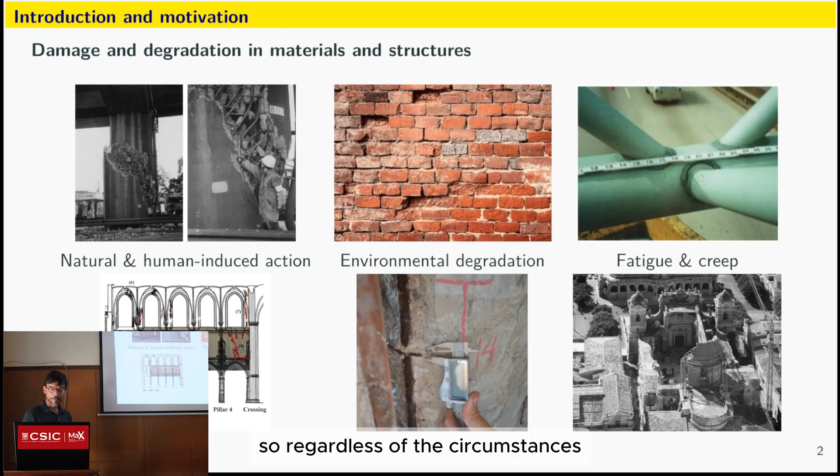Regardless of the circumstances, we all do research, and we do it for very specific reasons. In the case of the analysis of structures, the assessment of their condition and performance, we have to deal with some very specific and very serious problems related to the development of damage and degradation at the material level of existing buildings.

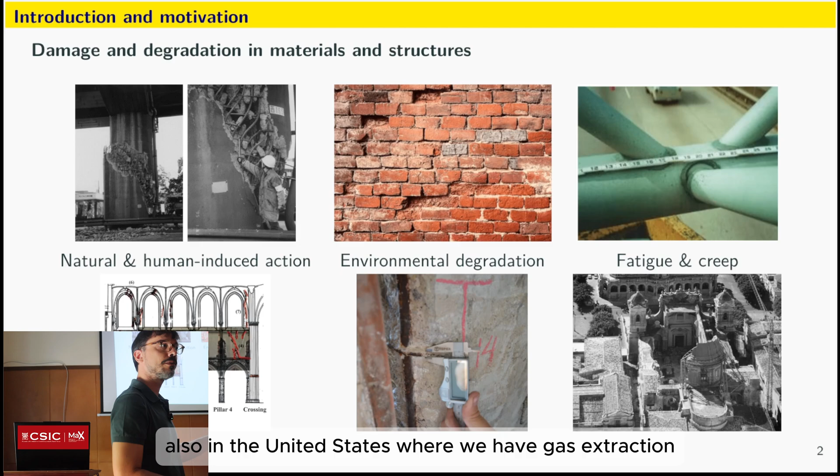We have many different actions that impose a burden on the structures. We have seismicity, movement of the soil, either dynamic or static, caused by tectonic earthquakes, and more recently in Switzerland, in the Netherlands, also in the United States, where we have gas extraction, oil extraction, mining. We have human-induced seismicity, which can cause severe demand on existing structures.

We also have environmental degradation from climatic conditions, from pollution, from chemical contamination of the materials, which in masonry structures is not such a serious problem. It can cause superficial degradation, but doesn't very often endanger the condition of the structure. But in a reinforced concrete structure, where the main source of weakness is the reinforcement, this can be a severe problem. And of course we have problems with fatigue and creep.

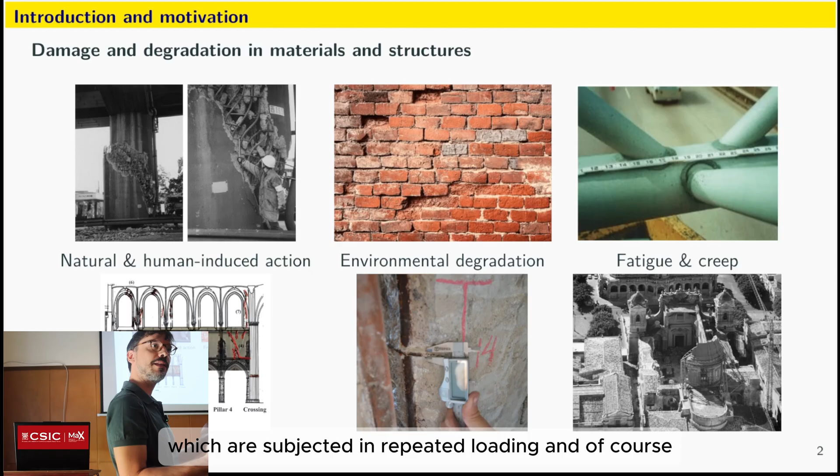Fatigue is a very big problem in infrastructure, mostly in bridges, which are subjected to repeated loading. And creep in historic structures, heavy structures subjected mainly to compression, can lead to admittedly spectacular, but very serious collapses, such as has happened in historic buildings in the past.

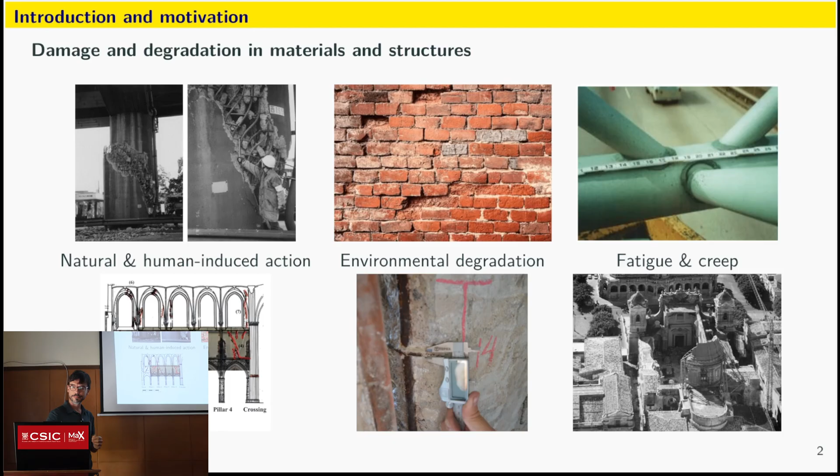All of these things can deteriorate the condition of the structure. It can cause loss of architectural and cultural value, and it can lead to loss of life. And of course, we do not want to have any of that. So this is all related to damage.

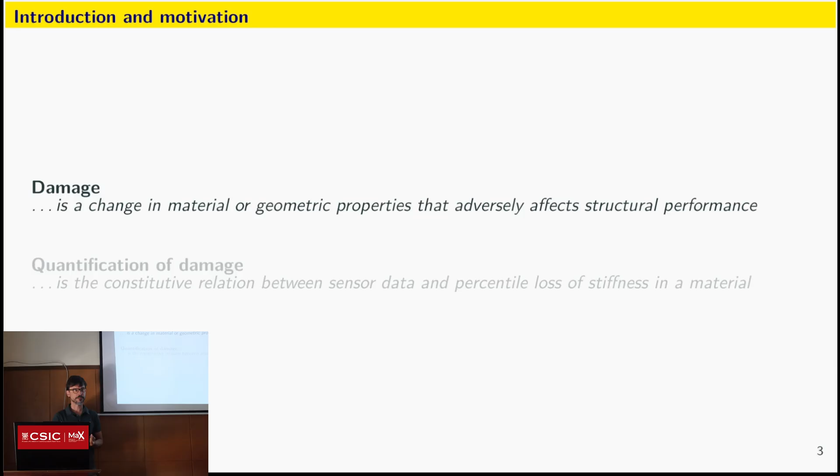We all know what damage is, but let's start with a basic definition. It is a change, a degradation of material or geometric properties that affect essentially stiffness and strength - structural performance. Of course, we need to define what structural performance is. We know what damage is, but we do not really know how to quantify it, how to relate one physical variable that we measure to a degradation of strength and stiffness.

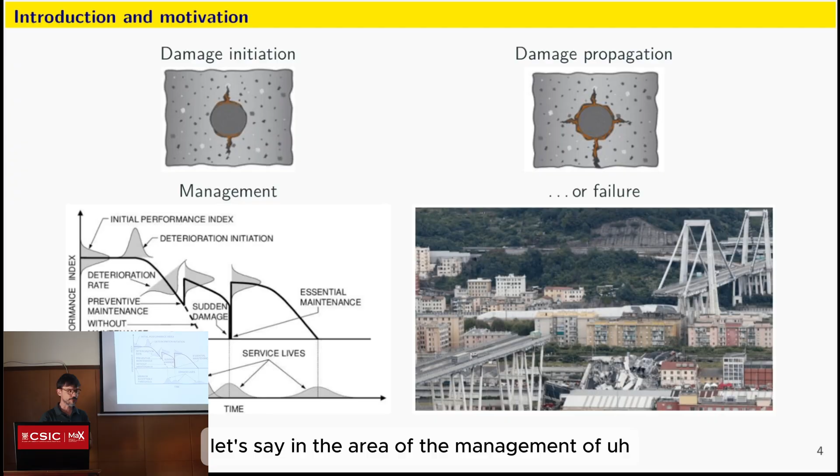And why is this important? I really don't need to tell you, but let's remind ourselves of what we are doing here. In the area of management of infrastructure, of buildings, what we want is to maintain a certain level of structural performance, which is affected by the onset and development of damage.

At the levels where the damage is not really visible in the structure, such as when we have corrosion of the reinforcement, which can cause cracks in the interior of a building, this does not affect performance very much, but we also cannot really see it. At the point where corrosion damage is so severe that we can see it, structural performance, let's say a quantitative index, has degraded quite a bit.

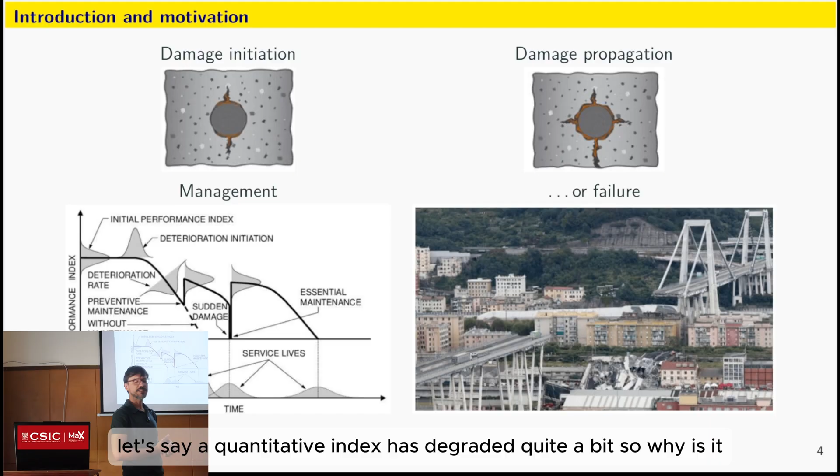So why is it important to detect the damage while it is still limited? Because it can be counteracted with simple interventions, technically and economically beneficial, and interventions that do not take too long and are not too disruptive. Of course, when we rely only on visual inspection to intervene and to strengthen or repair, then the cost of maintenance is much higher. So this is what we want to avoid.

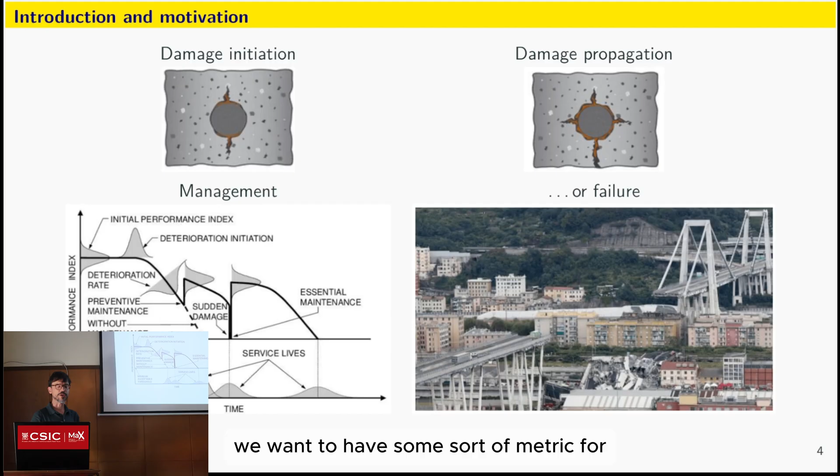We want to have some sort of metric for the performance index, and we want to be able to detect the damage before it becomes too serious. We have basically two avenues, two groups of methods that we employ, both very useful, both very important. First of all, we have non-destructive examination, evaluation, testing, however you want to call it.

It's kind of like a spot test. You go once to the structure, you inspect, you collect some data, and then you relate it to, or input it to, some sort of computational model in order to assess the condition of the structure. So this is all quite manual, very hands-on. You go, you collect, and then you go and process.

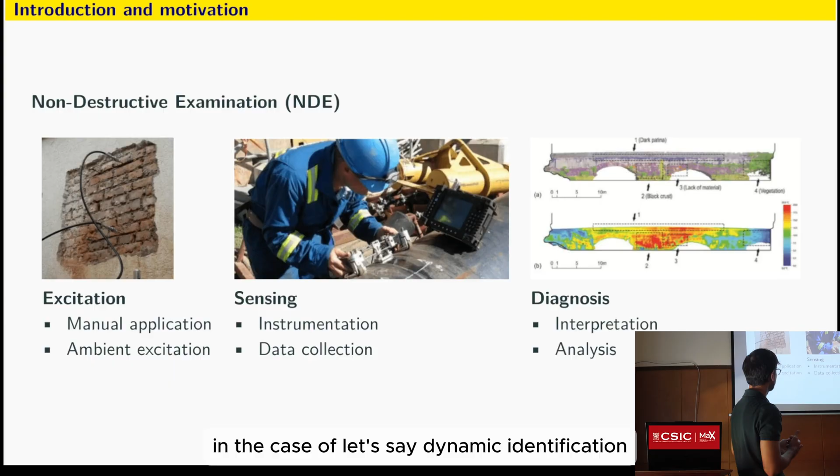You might, in fact, induce a little bit of manual excitation on the structure in the case of, let's say, dynamic identification, or you might rely only on ambient excitation. The instrumentation is usually simple, not cheap, but simple, just to apply and collect the data. We do a spot data collection, and then we go back to the office and we do the diagnosis based on some sort of mathematical model. We interpret the results that we get and we perform an analysis.

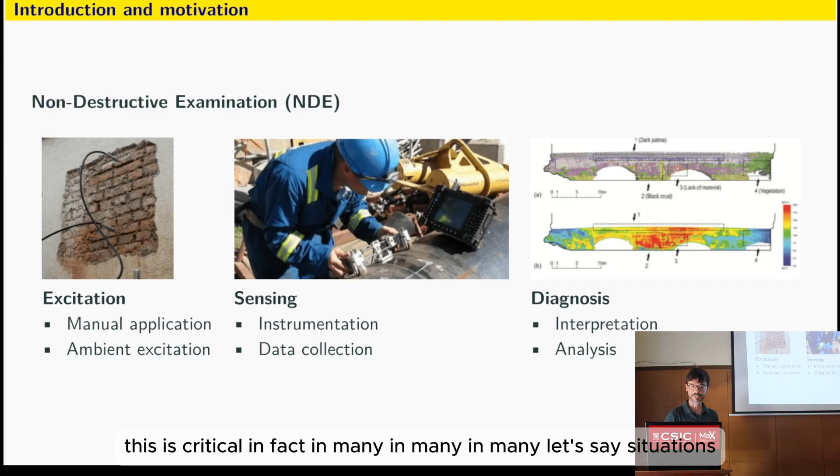So this is all very good. This is critical, in fact, in many situations, but it does not tell the whole story. If we want to have the whole story of what is going on in a structure, we need to monitor it. We need to be able to see the degradation happening in real time. We need to monitor some sort of physical parameter, some physical property, and relate it to some sort of performance index. What are the things that we usually measure?

Temperature, displacements, strains, some other things that we will see later on. The instrumentation for this is a little bit more involved, because it also involves the collection in real time of the data and the processing of the data in real time. And this imposes a few more requirements in terms of supplying all of these systems with electricity, some sort of connection for transmitting the data.

And of course, the processing of this data, since it is real time, it is dynamic, it's a little bit more involved. It involves some sort of signal processing to cancel out periodic or temporal effects, to be able to extract some features of the response, and to be able to quantify it. Relate the measurements of physical properties to a material or a structural property.

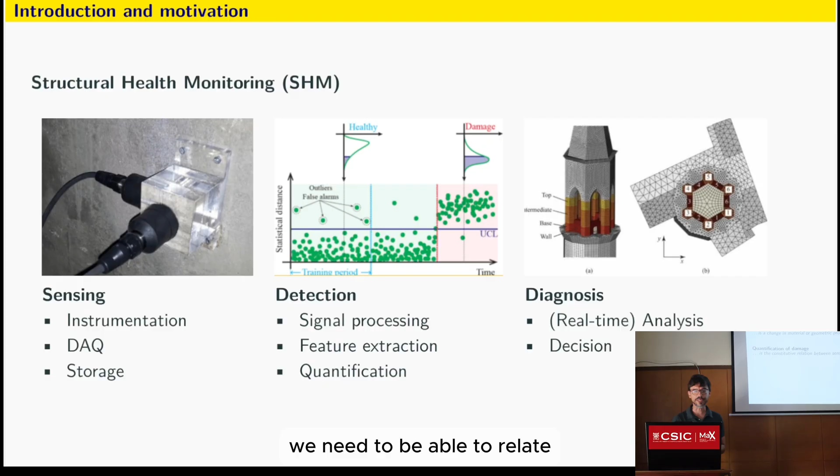So this is where, let's say, the concept of quantification of damage comes in. We need to be able to relate, have a constitutive relation between the data that we collect from sensors and some sort of performance parameter, okay, or a percentile loss of the stiffness or the strength of a material.

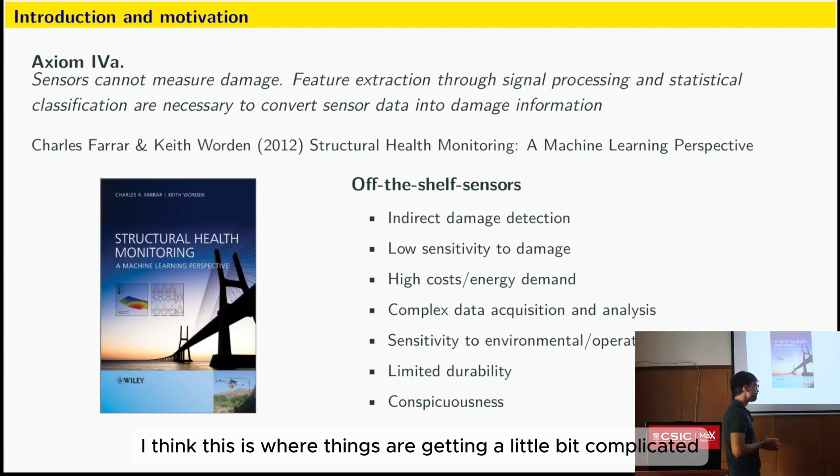Now, I think this is where things are getting a little bit complicated. It is a kind of an aphorism, but I think that it is relatively true, that we do not really have a direct relationship between the data that we extract from ordinary off-the-shelf sensors and, let's say, a material parameter that we can use in our computational model for the structure. So the data that we get from the sensors, we have to get through a lot of intermediate steps before we can have a proper analysis of the structure. And if you want to have a real-time model of the structure, this is quite a bit of an obstacle. So we're not there yet, I think, with off-the-shelf sensors, which also are characterized by an additional series of limitations.

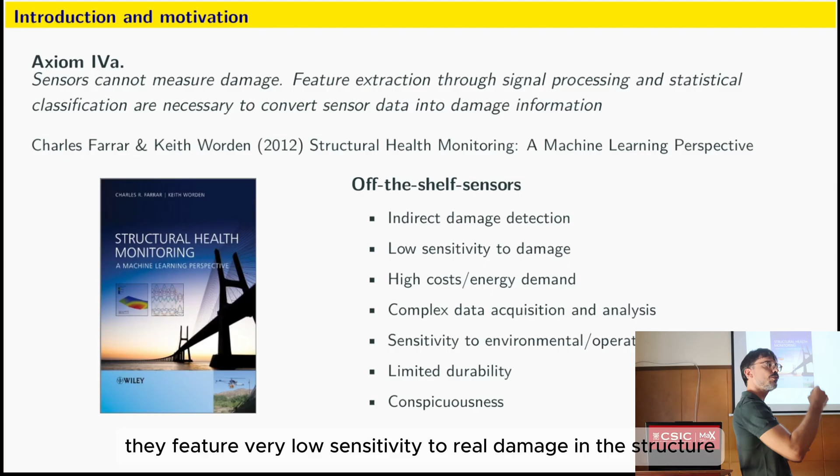Off-the-shelf sensors, like strain gauges, I'm particularly thinking about strain gauges, they have a very poor response to damage. If a structure is damaged in one point, it is very difficult to capture this effect with a strain gauge. They feature very low sensitivity to real damage in the structure. They also have quite substantial costs for installation, maintenance, and replacement, because their durability is not that strong. A strain gauge on a bridge exposed to the elements lasts for maybe 1 or 2 years.

And of course we have the problems that we discussed previously regarding complex data acquisition and analysis and sensitivity to environmental conditions. I would also add that sensors typically do not deform along with the structure. There is an incompatibility problem between the structure and the sensors.

So all of this is quite bleak, quite negative, but there are ways to go around all of these problems without altering the structure too much. I think the key is to have some sort of embedded sensor within the structure, something that is compatible structurally with the structure, deforms along with it, which means it has a double function within the structure, both structural and as a sensor.

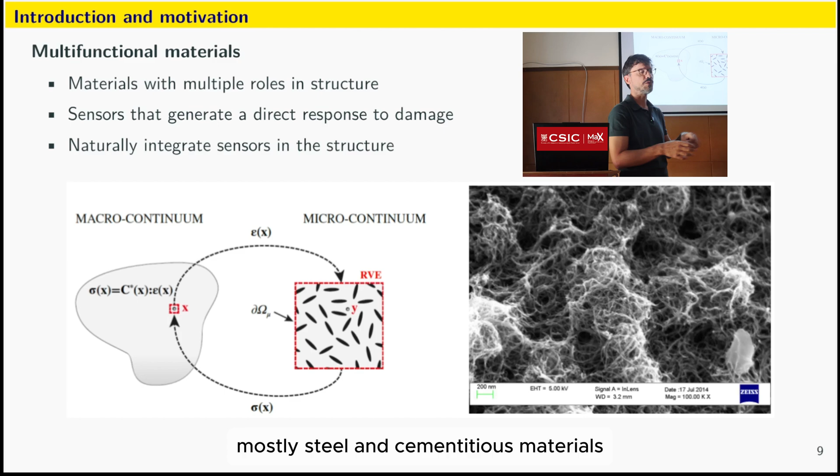Something that responds directly to damage, that gives you a radically different sensing result when the sensor itself is damaged, and something that can be naturally integrated within it. Since the existing materials that we ordinarily use for our structures, mostly steel and cementitious materials, do not feature these characteristics, we need to induce them somehow.

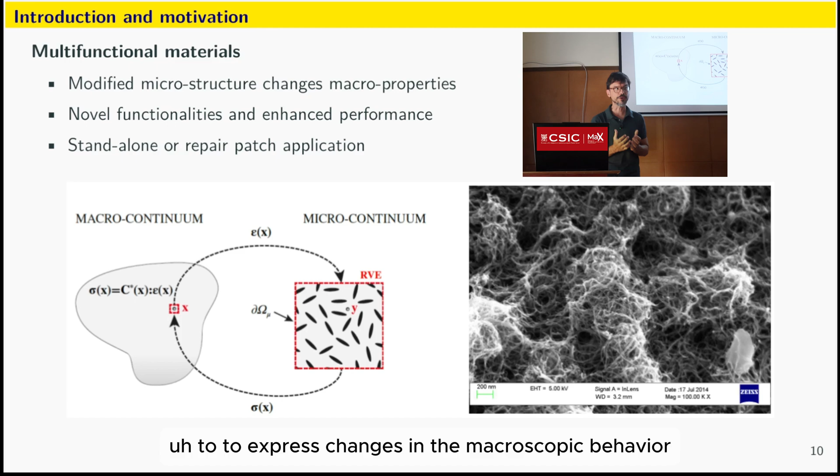The way to do this is to introduce changes into their microstructure, into the properties of their microstructure. We need to find a way to induce changes in the microstructure in order for the material to express changes in the macroscopic behavior, both as a structural component and as a sensor. These modified materials, in this way, we can introduce new functionalities and enhanced performance, both as sensors and as structural components.

And we can create materials that we can use as sensors in repair patches in existing buildings. We go directly to the place where we have registered damage, and we apply this new material, and we have at the same time a repair material and a sensor, either distributed or localized.

So, in order to do this, we have to harness a little bit some very classical behavior that is featured in really all materials. And I'm talking here about electrical resistance. All materials, or solid materials, have some sort of electrical resistance. They respond differently to an induced current. But also the resistance changes depending on the strain, the deformation characteristics of the material.

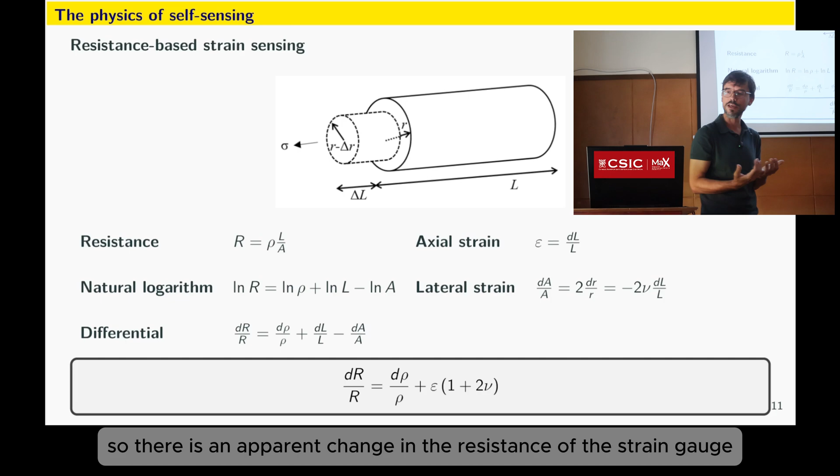Take, for example, the typical strain gauge. The way it functions is the strain gauge is deformed. The electric current going through the strain gauge needs to travel a longer distance, so there is an apparent change in the resistance of the strain gauge. This is what is called the piezoresistive effect, and it is a feature of really all solid materials. It is also present in cementitious materials as well.

So these are the equations. I don't think it's very interesting to get into that. But what we are mostly interested in is this part: the relation between the change in electrical resistivity of a material and an induced strain. If we can somehow control or amplify this effect, we can create materials that are very sensitive in that regard, where we induce a small change in the strain and we get a huge difference in the electrical resistivity. So this is what we need to do.

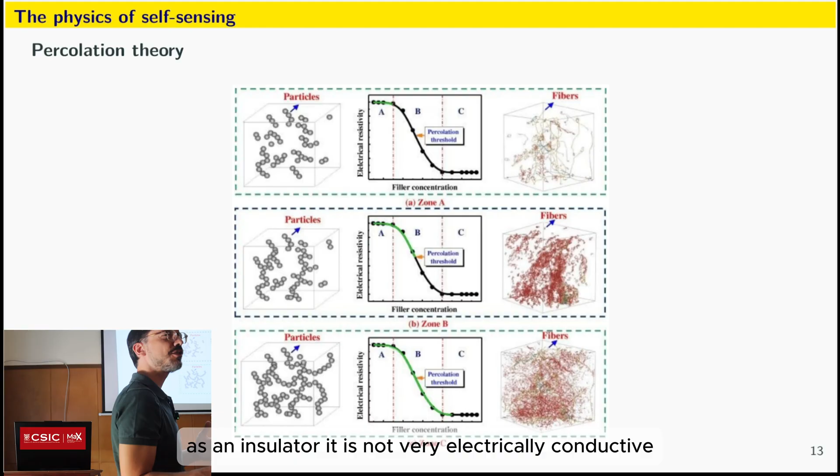Being a common feature in really all types of solid materials, it is interesting to extract some very basic features of this performance. Let's say that we have an ordinary material that more or less acts as an insulator, not very electrically conductive. If we can somehow disperse within the mass of the material some sort of conductive additive, we can in fact control the electrical resistivity of this material. The more conductive material that we introduce inside of the virgin initial material, the more the electrical resistivity decreases. And in fact, at the end, we reach a certain point where we turn it into a highly efficient conductor. But we do not want to make electrical conductors.

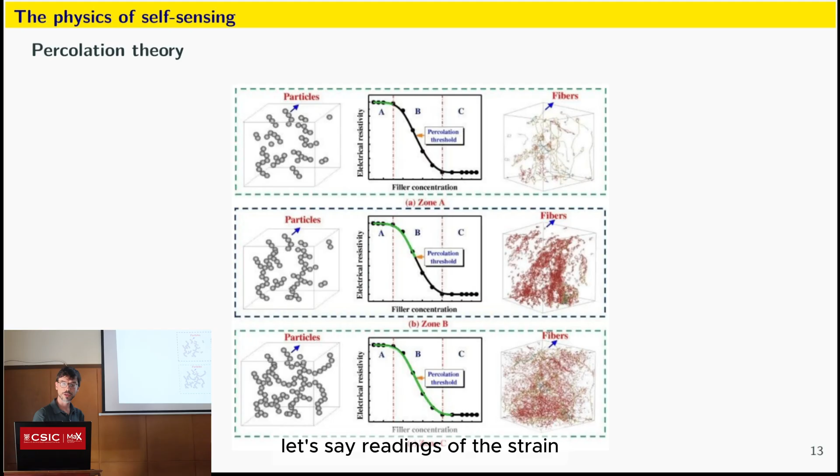We want to make sensors. And sensors need to be sensitive to changes in the strain. The point where this happens is what we call the percolation threshold. It is the point where the piezoresistive performance of a material is optimized. It is where it has the highest sensitivity and also the more stable readings of the strain. So we want to achieve that. We want to have a virgin material and put as much conductive additive inside of it as needed in order to turn it into an efficient sensor.

And then, of course, we have to calibrate it. We have to perform coupled mechanical and electrical tests in order to verify that this sensor has been optimized. So we need to do various mechanical tests, usually compressive tests.

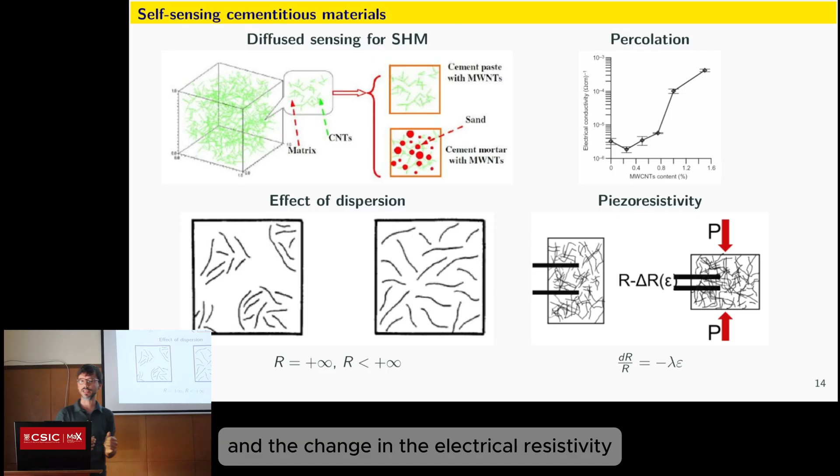To obtain a constitutive relation between the strain and the change in electrical resistivity. Artificial intelligence is nice, but it's always very important to go back to the physics in order to understand what is going on. So knowing all of this, and knowing a few things about the construction industry, we have to decide what sort of material we want to take and modify. In my opinion, and in the opinion of many people, cementitious materials are the best option for this. But why is this true?

First of all, what is a cementitious material? It's some sort of connecting matrix, some sort of connecting glue, which can be lime or cement, mixed with some sort of aggregate, like sand or gravel in the case of mortar or concrete, and whatever type of fillers we choose to include. I'm talking here about conductive fillers, which can be either in the nanoscale, the microscale, or even the macroscopic scale.

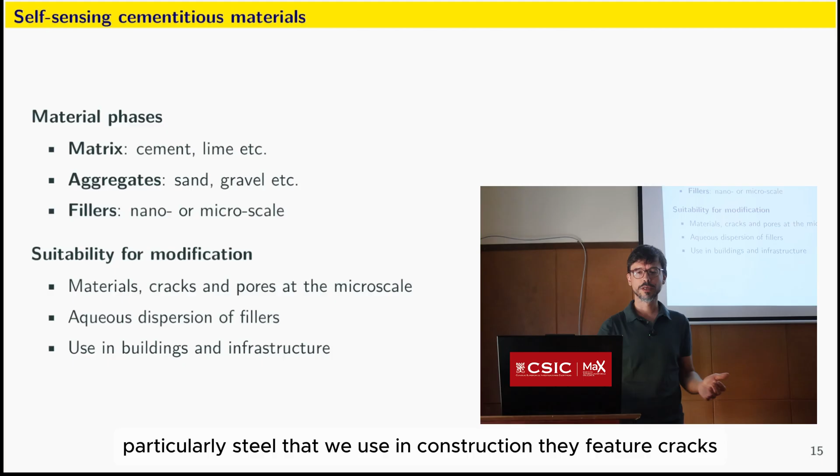And why are these materials exceptionally suitable for modification? I think the reasons are quite simple. First of all, these materials, in contrast to polymers or metals, particularly steel that we use in construction, feature cracks, imperfections, pores at the microscale, which is what we are trying to modify in order to change the behavior of these materials.

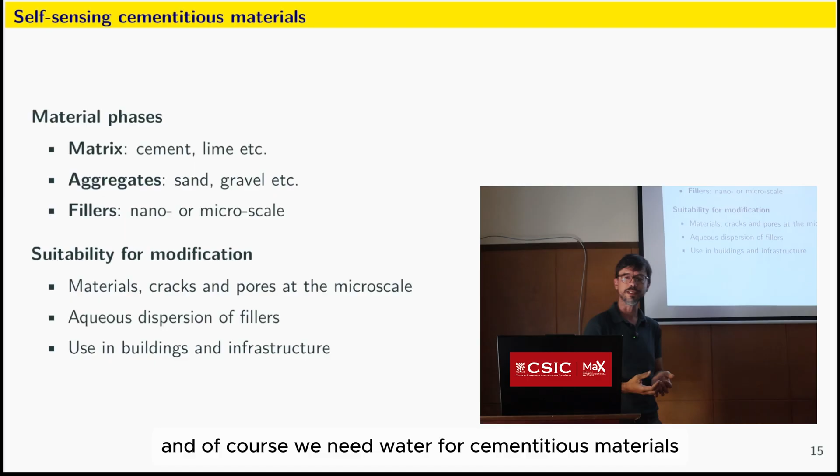Next, since we want the conductive materials to be evenly dispersed within the modified material, we want some sort of medium for dispersing. I think water is one of the best mediums we have to achieve this dispersion, and of course we need water for cementitious materials anyway. The final reason is that we use cementitious materials for everything - for structural elements, for rendering, for pavements, in bridges.

So the scope of applications is enormous. We can monitor strain, we can monitor temperature in a distributed way, we can monitor traffic in bridges - we can use them for really whatever we want.

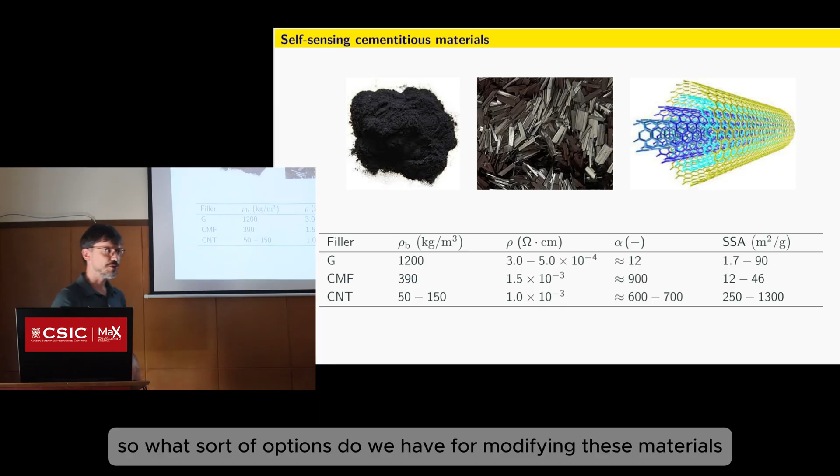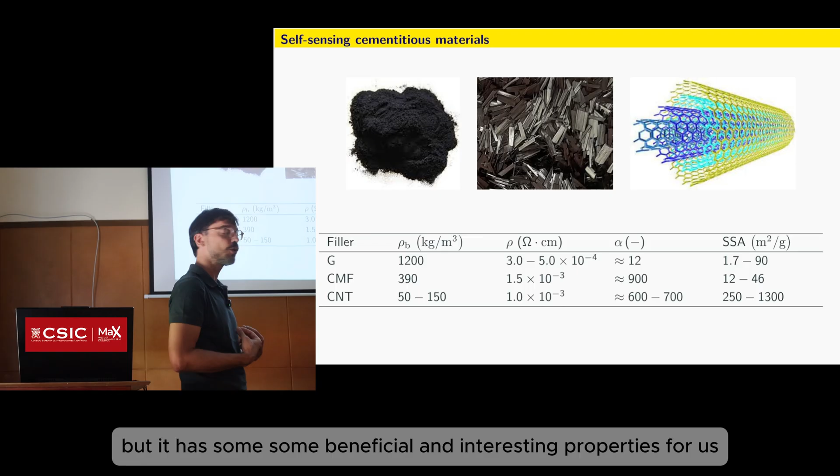So what sort of options do we have for modifying these materials? I think most people have worked with three sorts of materials - two of them because they are easy to use, and the third because it is quite popular. I'm talking about graphite powder, a material that costs really nothing and you can find it everywhere, but it has some beneficial and interesting properties for us, namely the high electrical conductivity. Anything based on carbon is going to be very, very electrically conductive.

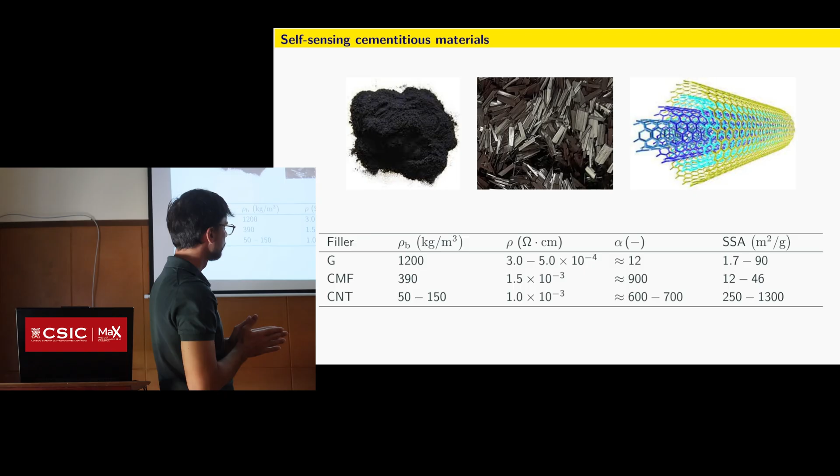Next, we have carbon microfibers. We're not talking about long fibers coming in tows, but chopped microfibers, something that can be dispersed in the material and create a conductive network. They also cost nothing, they're very light, and they have a very high aspect ratio as a filament - they are like a thread.

What we know is that when you create a composite material and want to modify its properties, when you introduce a filler that has a high aspect ratio, you need a much smaller percentage in order to modify it efficiently. Graphite is not characterized by this high aspect ratio, but it is of course very easy to obtain and disperse.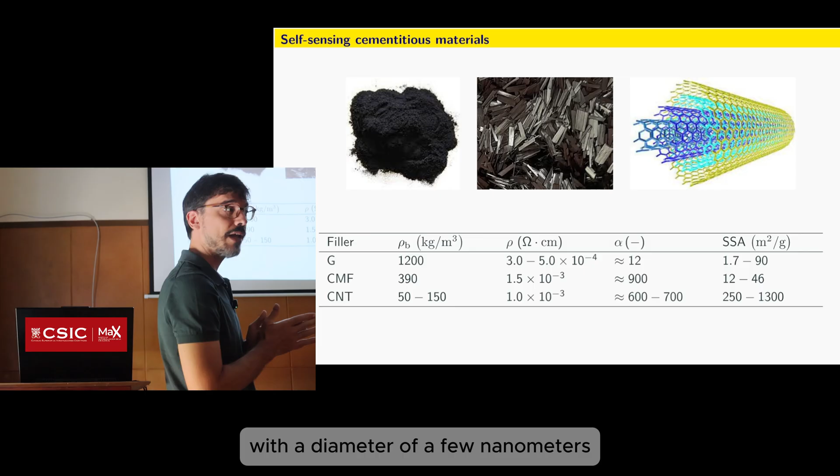And finally, we have carbon nanotubes, which are again filaments, which is what we want to see, with a diameter of a few nanometers. Now we're starting to introduce some difficulties, as we will see later. They have the properties we want - very high strength, very high electrical conductivity, very high aspect ratio - but the difficulties arise when we want to disperse them inside the material.

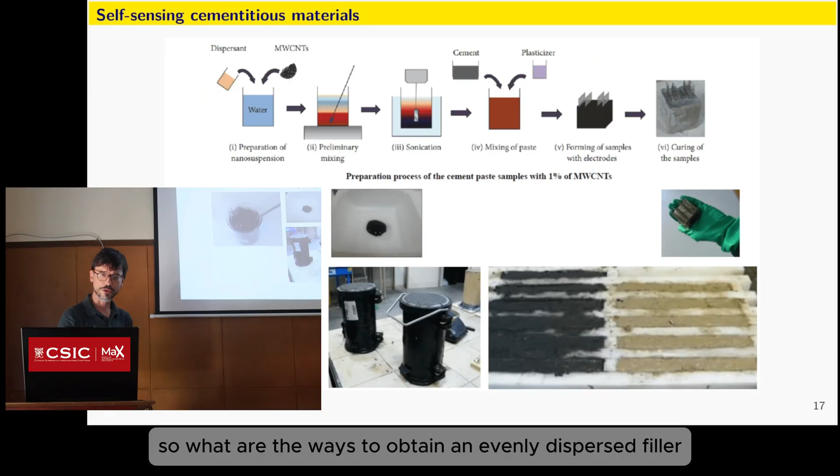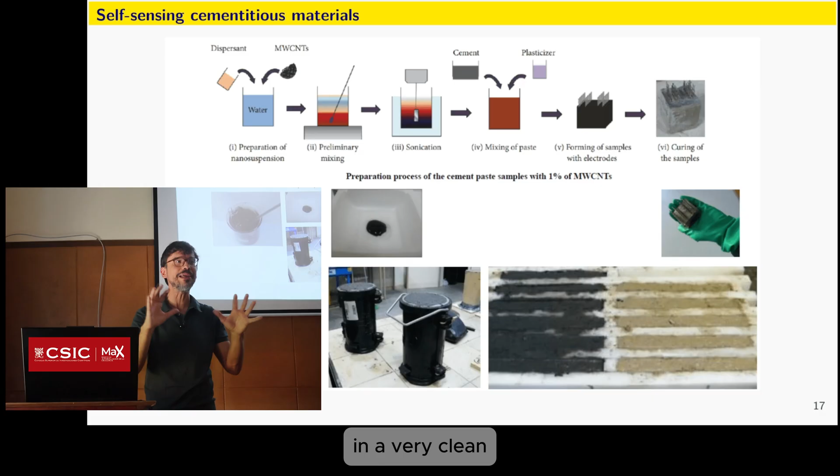So what are the ways to obtain an evenly dispersed filler in the matrix? We have to disperse it in the water. First, in order to disperse a nanoscale material in water, one of the simplest methods available is sonication. Through an ultrasonic probe, we sonicate the mix of water with the nanotubes, for example, in a very clean, very sterile environment. Then we introduce all of the cement and all of the aggregates, and we prepare our specimens.

Note here the difference obtained in the color from the presence of the nanotubes. Even at a very small percentage, they modify the color quite a bit. This is something we need to keep in mind when talking, for example, about historic structures. This is just with a 1% replacement, or rather addition, of carbon nanotubes in the paste - so this is quite a substantial change.

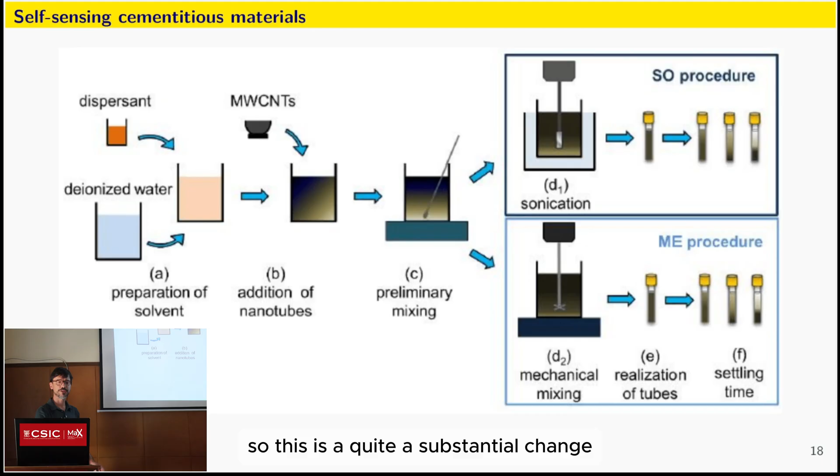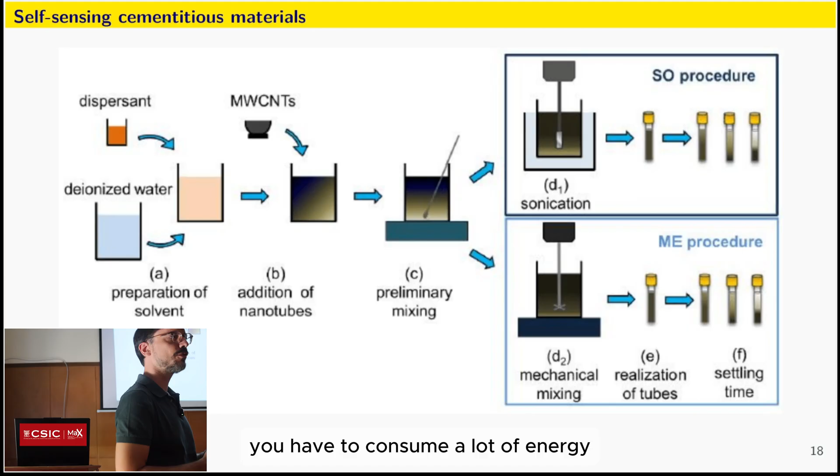Sonication is a huge bottleneck for dispersing nanotubes in water. You can try an ultrasonic bath, but that takes many hours, even overnight, and it's not very efficient. You consume a lot of energy and a lot of time. You can use a probe sonicator such as this one, but you cannot really sonicate very large quantities of water.

And here we're talking about the construction industry. We need huge amounts of material. We cannot just sonicate a small amount of water and expect to use it in a construction project.

So another option is to use chemical dispersants in order to distribute the nanotubes inside the material, but that has the potential drawback that these chemicals can form an insulating film around the fillers, which blocks electrical transmission. So it defeats the purpose of modifying the material in the first place.

Javier, don't look. These are SEM images, and I know you're very sensitive. But okay, we can...

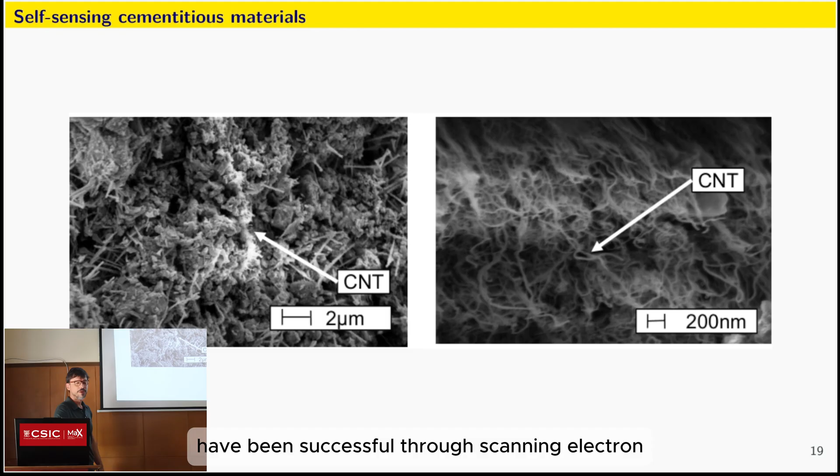In fact determine whether our dispersion efforts have been successful through scanning electron microscopy, which is of course also quite a slow and involved process.

So lots of problems. That's why I think when we want to keep an eye on the construction industry, we have to turn to different sorts of fillers, especially graphite and CMF, carbon microfibers.

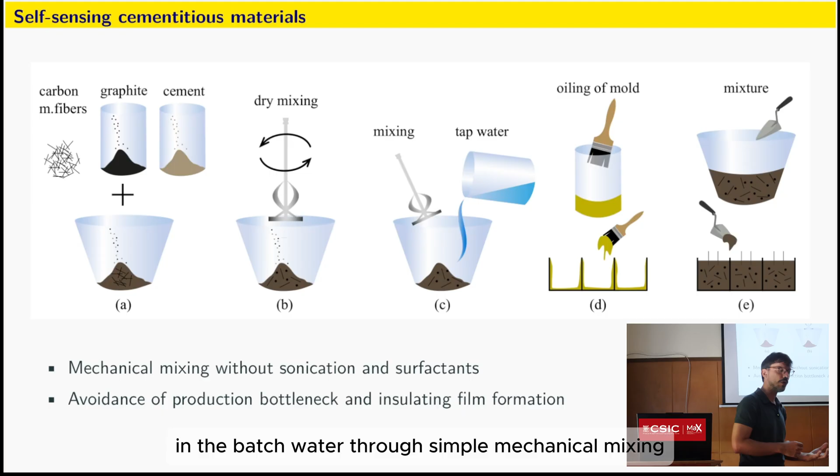Why? What is the benefit? The benefit is not only that they cost nothing and they are very easy to obtain. The benefit is that they can be dispersed, either in the dry ingredients or in the batch water, through simple mechanical mixing. Mechanical mixing is something that you can do on site of a construction. You cannot sonicate in a construction site.

So really, without introducing any major changes in the fabrication process, we can modify efficiently these materials, either with graphite or with CMF, or maybe even with a combination of the two.

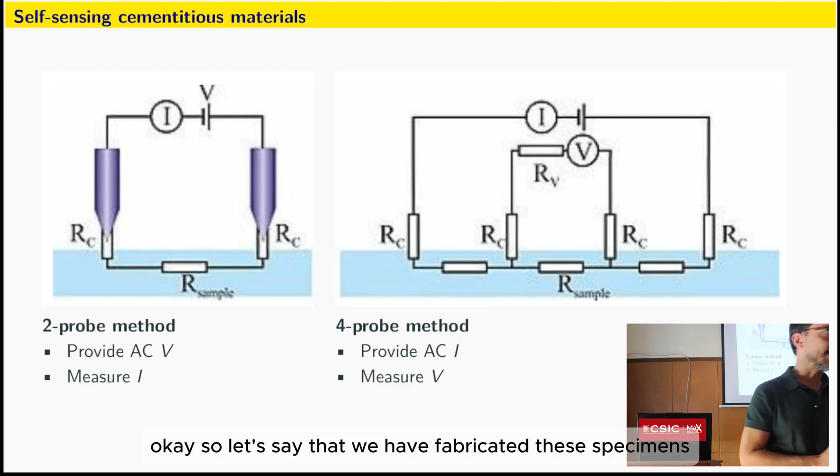Okay, so let's say that we have fabricated these specimens. Of course, we need to take electrical measurements in order to determine the resistance. And we have two ways to do it, depending on the size of the specimen that we want to test.

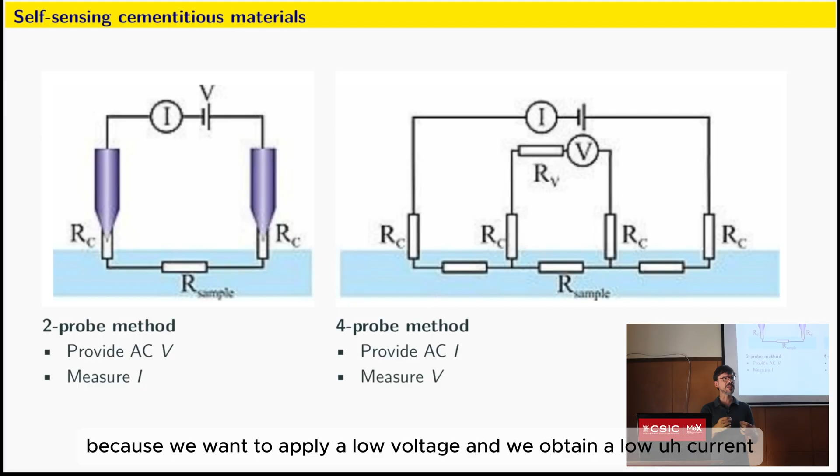We can either do a two-probe method, which is the easiest to do, where we supply an alternating voltage and we measure the generated current. And we're talking about currents in, I don't know, the microampere range, because we want to apply a low voltage and we obtain a low current.

Or we can alternatively try a 4-probe method. This is just depending on the capabilities of the lab. I think the results are going to be more or less the same.

So we create these cementitious materials, and of course they age, and they age quite differently depending on the type of filler that we use. The development of the electrical resistivity is, of course, related to the expulsion, to the loss of water, either through hydration or through evaporation.

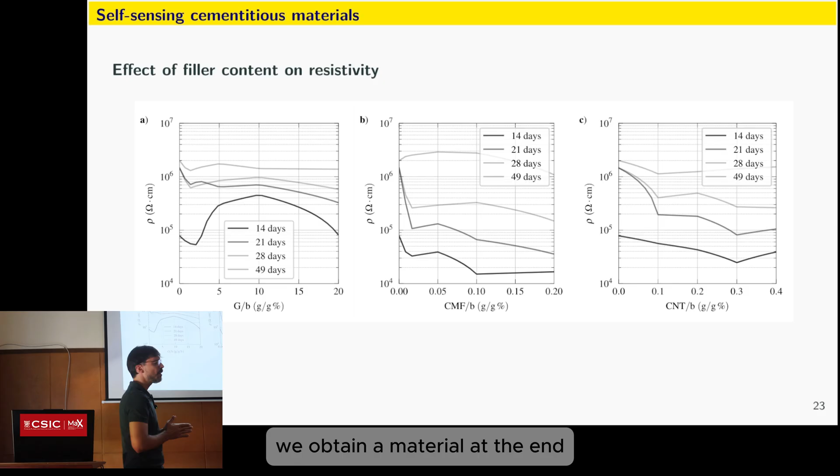Independently of the type of filler that we use, because we use it also in small amounts, we obtain a material at the end whose electrical resistivity is not that different. Let's say at 49 days of age, all of the materials that we modified here, with CMF, with graphite, or with carbon nanotubes, they more or less had the same electrical resistivity.

So at first glance, maybe we were not really successful. But as you will see later, we managed to modify efficiently these materials.

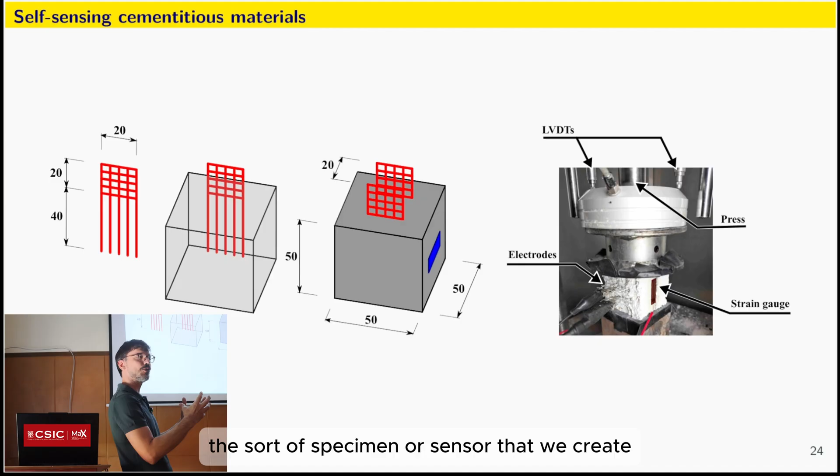Here we have a schematic of the sort of specimen or sensor that we create with embedded electrodes. I've had many arguments about the material that we're supposed to use. I think it makes very little difference whether you use stainless steel or copper. A researcher said that we should use gold, but I don't think that's very practical.

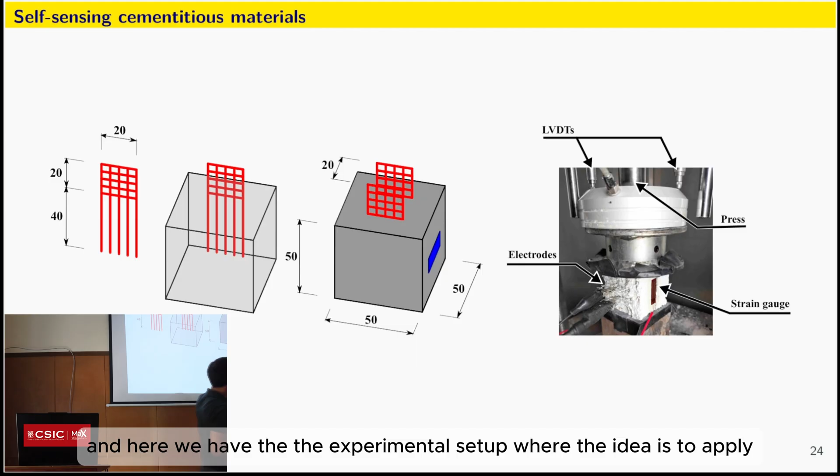And here we have the experimental setup, where the idea is to apply a cyclic compressive load, measure the strain along the direction of the application of the load, and measure the change of the electrical resistivity along this direction.

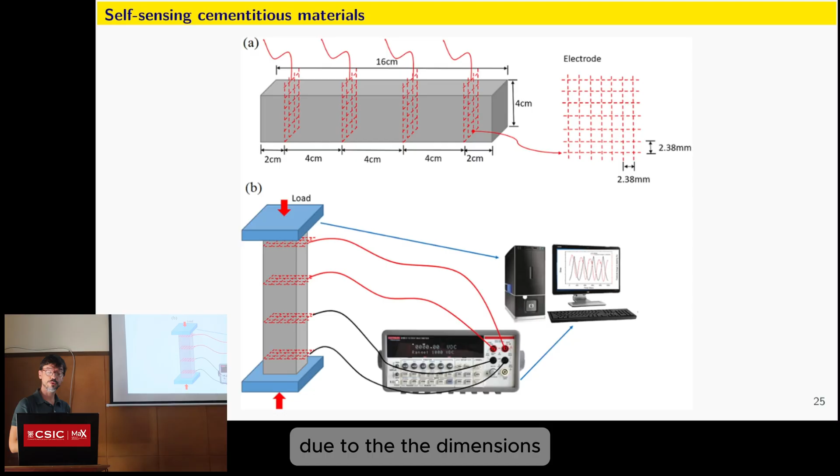We can also try other different specimen sizes, the typical prismatic specimens. These are, I think, more conducive to 4-probe testing due to the dimensions. But the principle is always the same, it doesn't really change.

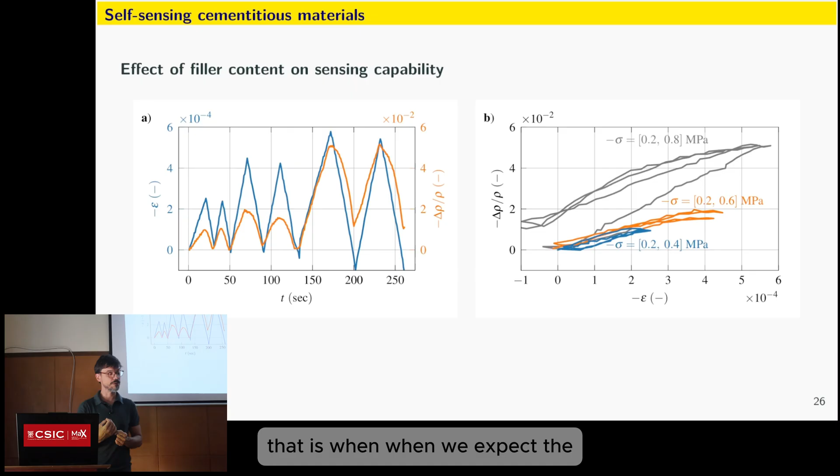Until, of course, the specimen starts cracking, at which point we see an increase in the gauge factor. This can be a method of detecting damage. When we see radical changes in the gauge factor, that's when we expect the specimen to be damaged. So it can function not only as a strain detection mechanism but also as a damage detection mechanism, which is quite important.

Electrical transmission in a cementitious specimen is directly related to water content, so we expect the electrical resistivity to increase as curing continues. We had a remarkable effect where, at the end of hydration of the specimen, there was a very strong stabilization of the resistivity. This was substantially affected by the presence of the carbon microfibers.

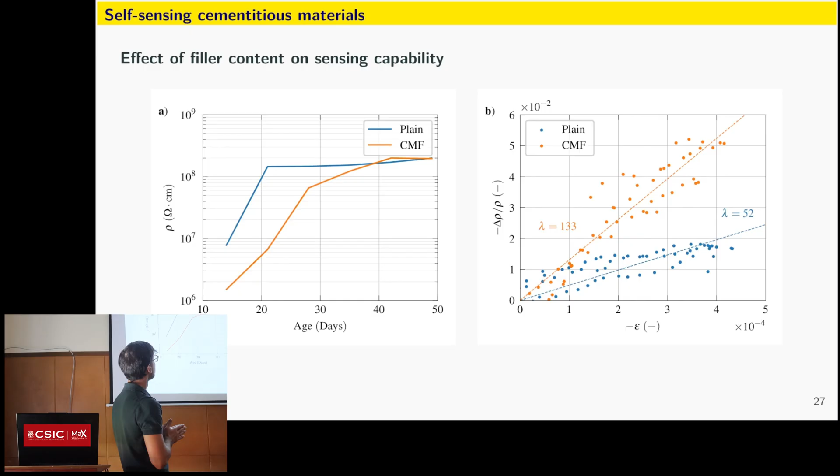Here in blue we have the typical curve we expect from an ordinary cementitious specimen. Around 21 days, carbonation takes over from hydration due to the low water content, and the electrical resistivity stabilizes. This behavior appears to be retarded in the presence of CMF. Even in very small quantities, it can affect the hydration of the specimen, so we need to keep this in mind. But the effect on the sensitivity of the specimen was enormous.

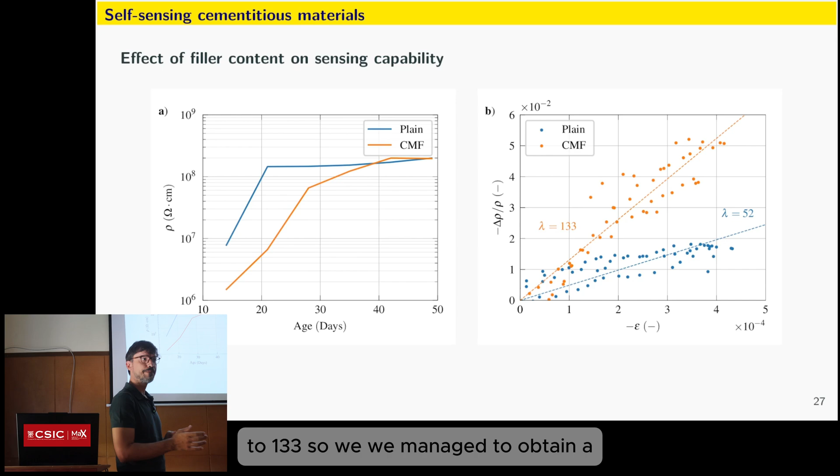We went from a gauge factor of around 50 to 133. So we managed to obtain a material that is far more sensitive in terms of sensing capabilities, which is exactly what we want to achieve.

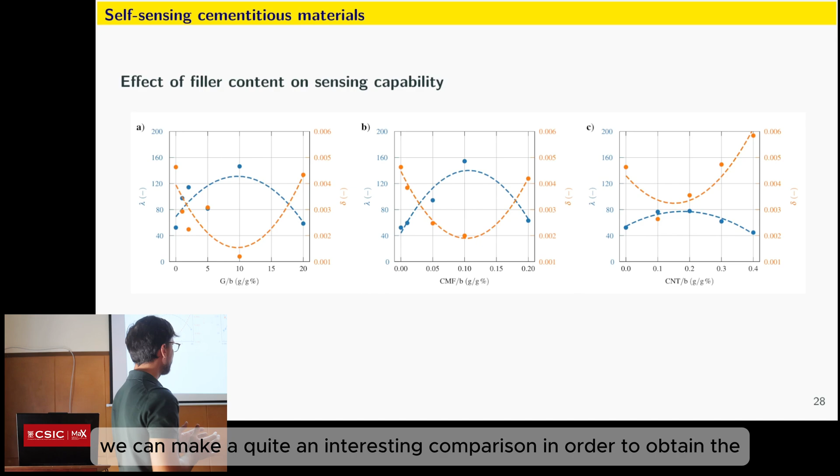We tried different series of conductive fillers: graphite, CMF, and nanotubes, and we managed to determine the percolation threshold for all series of fillers, allowing an interesting comparison. To obtain the percolation threshold with graphite, we had to add around 10% of the weight of cement in graphite, which is quite a lot and can affect many other properties.

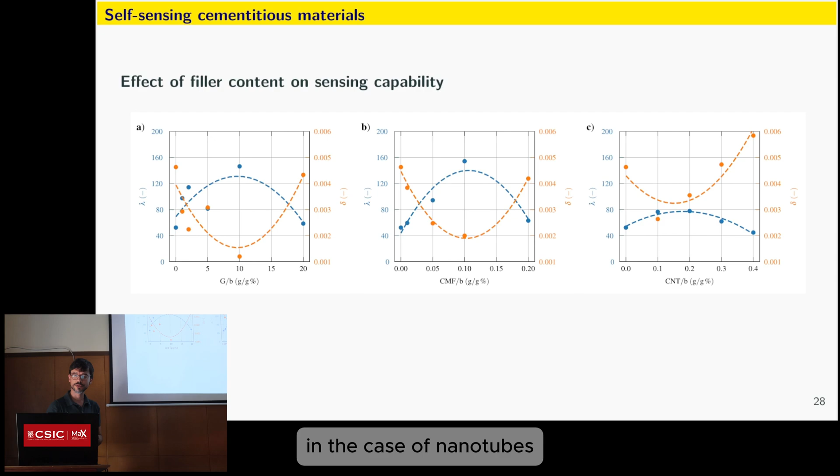But of course these fillers, as expected, don't only affect piezoresistive performance, they also affect physical performance. The most radical effect we saw was on the porosity. The addition of all of these fillers nearly always resulted in an increase in porosity.

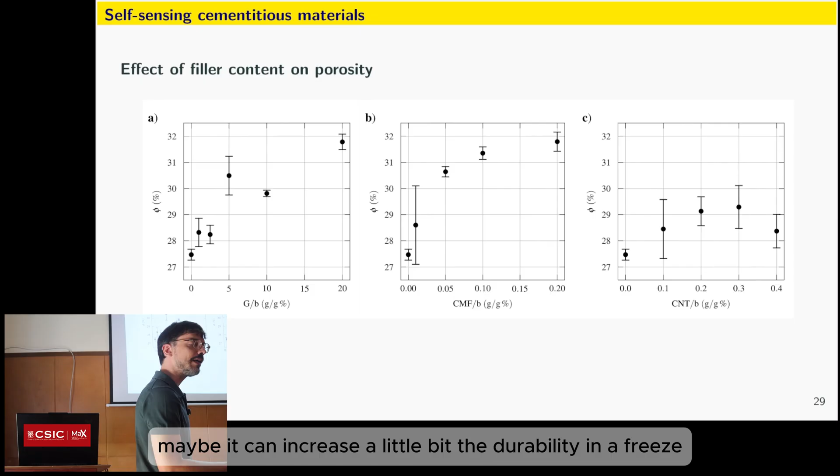Is that bad, is it good? Well, mostly bad. Maybe it can increase the durability a little in freeze-thaw conditions, but maybe decrease the durability in the case of salt intrusion. So we need to balance these things out.

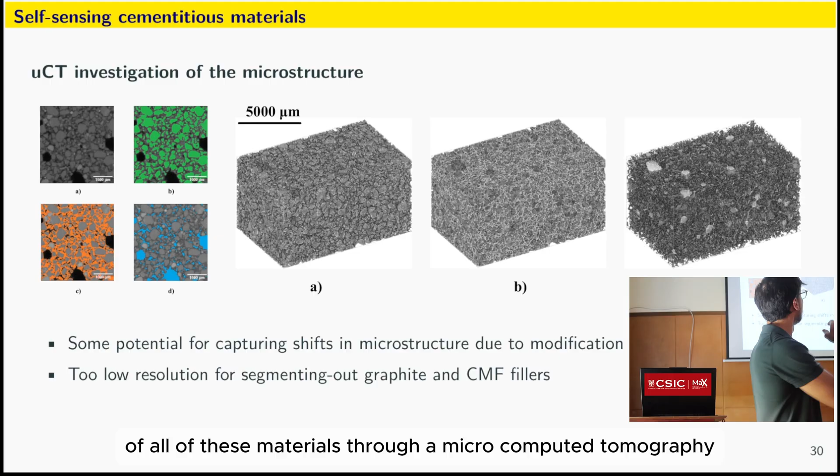We also tried to quantify and visualize the internal structure of all of these materials through micro-computed tomography. We managed to get some results and correlate them with the experimentally determined porosity. But the most important problem was that we were not really able to segment out the fillers we had, especially the carbon microfibers, so there's more work to be done to visualize and segment out the conductive fillers.

Now regarding durability, some more bad news. Water absorption was increased in the case of the presence of CMF for this material. Not by a lot, but for long-term durability it can be quite detrimental.

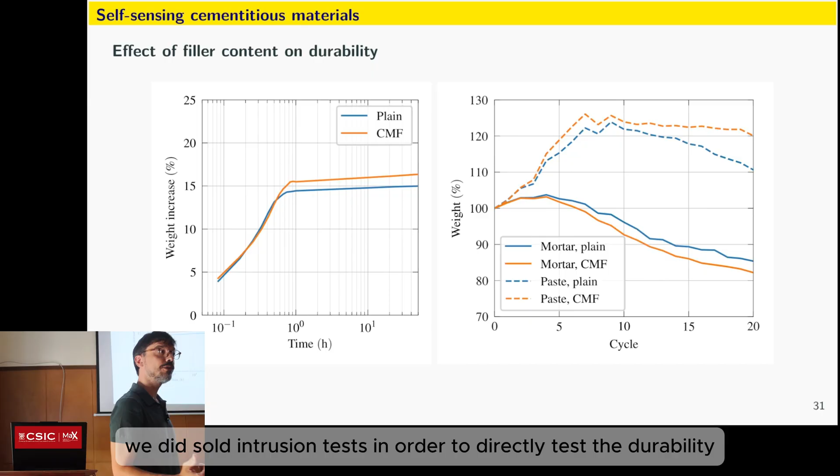We also did salt intrusion tests to directly test the durability, and we had an interesting result. It turns out that the plain paste, when modified, has substantially higher durability, but the mortar has slightly lower durability when modified. Not by a lot, but it can be quite substantial.

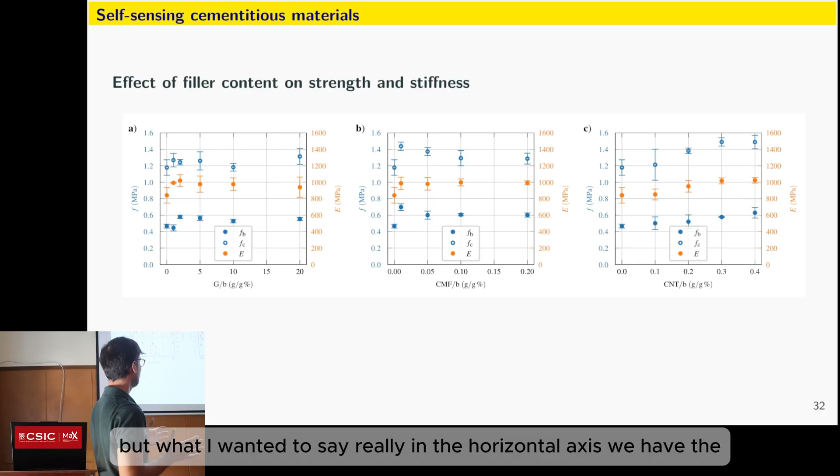So I thought I was being very smart when I made these graphs to put everything together, but now that I look at it, it's very hard to understand what I wanted to say. What I wanted to say, really, is that in the horizontal axis we have the concentration of the fillers, and in the vertical axis we have the strength and the Young's modulus.

So we are mostly interested in the bending strength of the material. We do not expect it to work so much in compression, but rather we wanted to avoid tensile failure. And we're interested also in the Young's modulus.

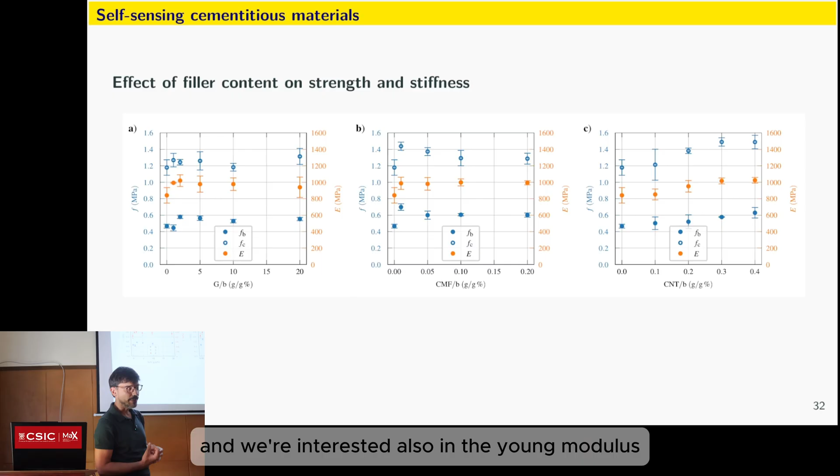In the case of all fillers, we had a notable increase in all of the properties. I think the most impressive change that we had was in the case of carbon microfibers. Adding 0.01% led to an increase of almost 50% in the bending strength. So we add nothing and we get something very substantial in return.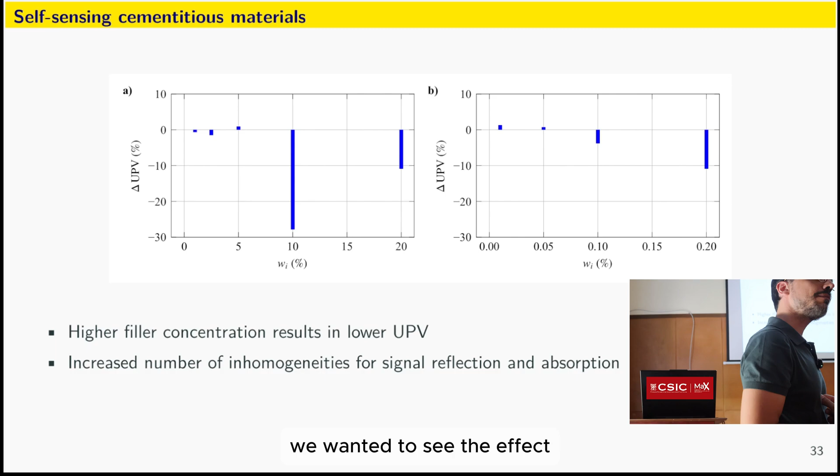We also started playing around with something that ended up being very related to what Javier is doing. We wanted to see the effect on the ultrasonic pulse velocity of these modified materials.

We had quite an obvious outlier in the case of the graphite, but the general trend is that the more filler you add, the more conductive filler that you add, even if you increase the Young's modulus, even if you increase a little bit the density of the material, even if you increase its strength, you get a notable reduction in ultrasonic pulse velocity.

This was especially apparent in the case of carbon microfibers, where adding 0.2% by weight of the binder, we had a 10% decrease in ultrasonic pulse velocity.

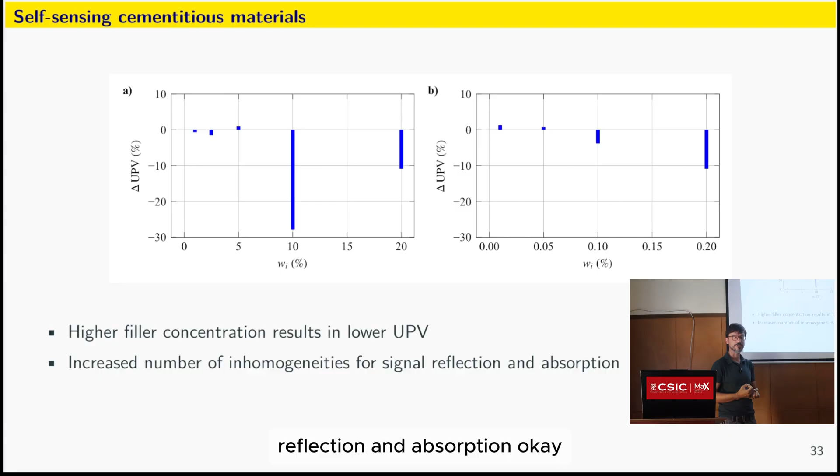I think the explanation for this is that we increase essentially the number of inhomogeneities in the material, so more opportunities for signal reflection and absorption. So even though we have a more dense, stronger material, we have a slower travel speed for the ultrasonic pulse.

So we go through all of this trouble. We create these small little cubes. We have calibrated them. We know the gauge factor for this thing. So what do we do with it?

Well, one solution, one possible option is to use it as an embedded sensor inside of a bigger structure. We take the initial calibrated sensors that we have tested in the lab, and we embed them inside of a larger concrete cast. So what does this give us?

It gives us an embedded sensor inside of the structure that has a higher durability. It deforms thermally along with the surrounding structure, and it costs nothing essentially.

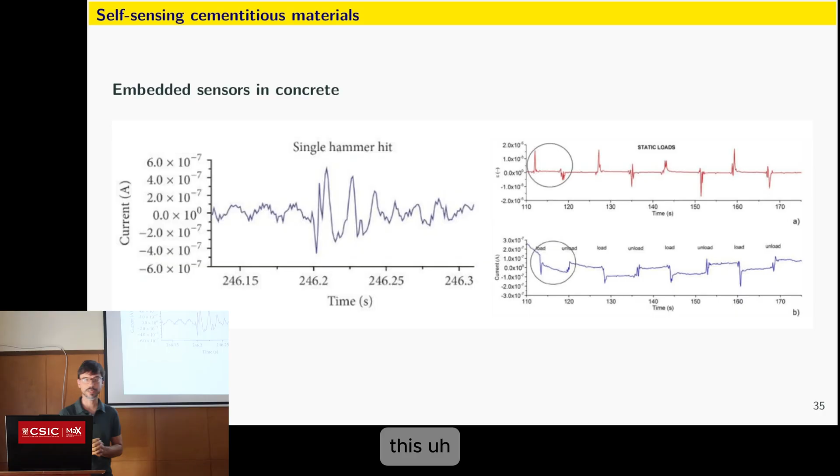But that is one option. I'm not sure that this is the best one. But these sort of sensors have in fact exhibited quite a strong sensitivity, not only to static testing, but also to dynamic testing. So even with a simple hammer test, we were able to pick up the induced strain in the material through this kind of crude sensor.

The more optimistic or more ambitious application is to create entire structural elements out of these modified materials. Carbon nanotubes would be pushing it a little bit too far, I think, but graphite and carbon microfibers, they work quite well in that regard.

And that gives you essentially a structural element that is a sensor of itself. You can measure through surface measurements of the electrical resistivity anytime you want, anywhere you want, strains, mechanical strains in the structure. And it responds both to static testing and to dynamic loading or cyclic loading.

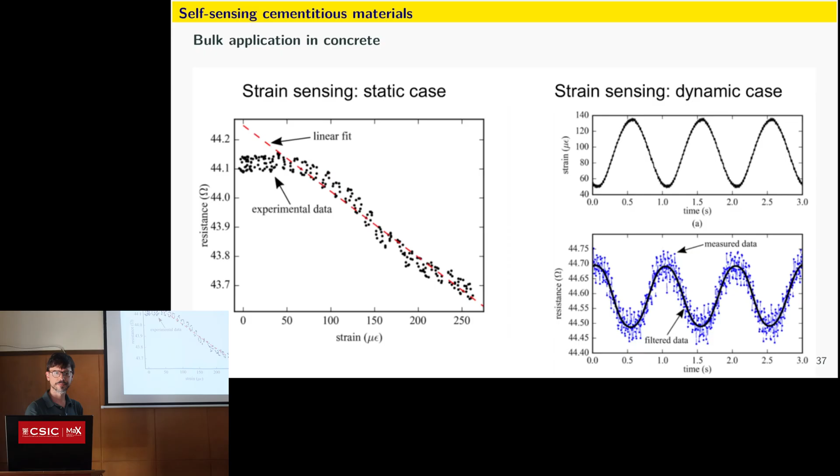So it works quite well. You can have a distributed sensor with virtually no additional cost. I think the benefits are quite obvious for this.

Now, my specific thing that I wish I could show you, but we're doing the final experiments now, is to use this sort of material as an embedded sensor in historic buildings. So what is the problem with historic buildings? You do not really have many choices on what material to use for intervention.

On the other hand, when you have a historic masonry building, there is a specific intervention that you do quite often, and that is repointing of the joints. Repointing of the joints in historic buildings is done with lime mortar.

So why not take advantage of this? At the next repointing operation, we repoint with this sort of smart mortar in order to have a distributed sensor at the place where we need it.

So we have a material that is slightly modified with carbon microfibers. The color is not that different. The strength is not that different. It is a little bit higher, but we do not want it to be too strong anyway.

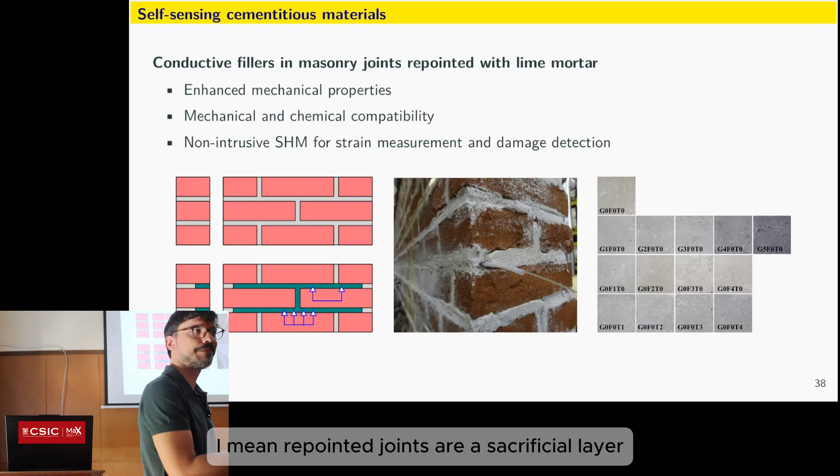And it is a more efficient sensor of deformation. It is not as durable as the original material or as a new lime mortar, but that doesn't matter. I mean, repointed joints are a sacrificial layer. You're going to repoint them at some point anyway.

So I think that is one possible way to have an embedded sensor system, distributed or localized, in a historic building, with the mechanical benefits and with the sensing benefits.

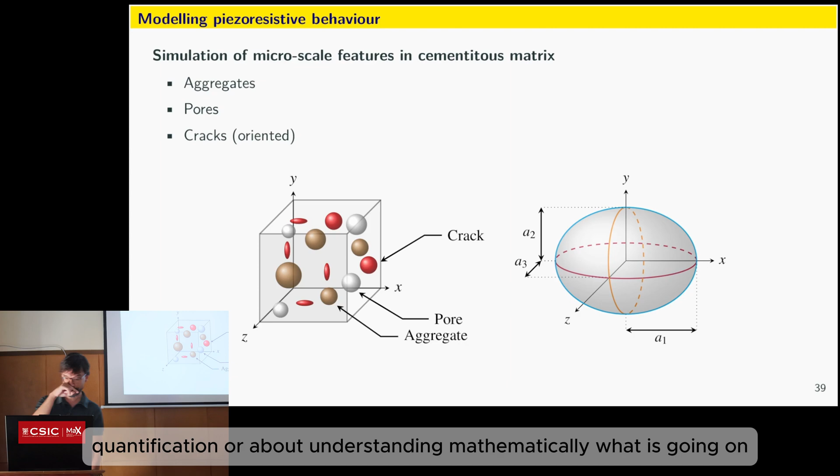So, regarding experimental testing and application, this is what I have for you. But I did promise a few things about quantification, about understanding mathematically what is going on with these materials. So we're going into the realm of micromechanics of cementitious composites. It's really important to understand this in order to understand the physical phenomena of what is going on with these materials.

So what we want to do is to model an existing material that features certain aggregates, pores, cracks randomly oriented within it in some sort of micromechanical context. Let's say inclusion-based micromechanics is a prime application for this sort of thing.

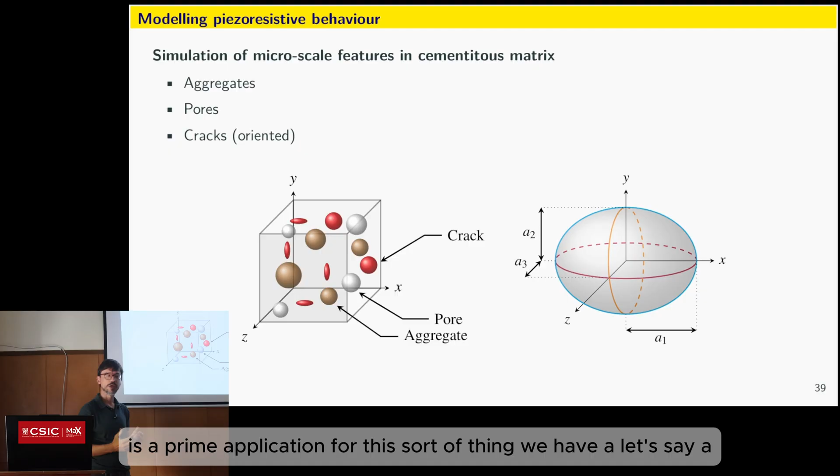We have a homogeneous isotropic matrix with evenly dispersed inclusions inside it. Each one has its own aspect ratio, it has its own volume fraction within it, it has its own properties. This is exactly a perfect description of what is going on in concrete or in mortar.

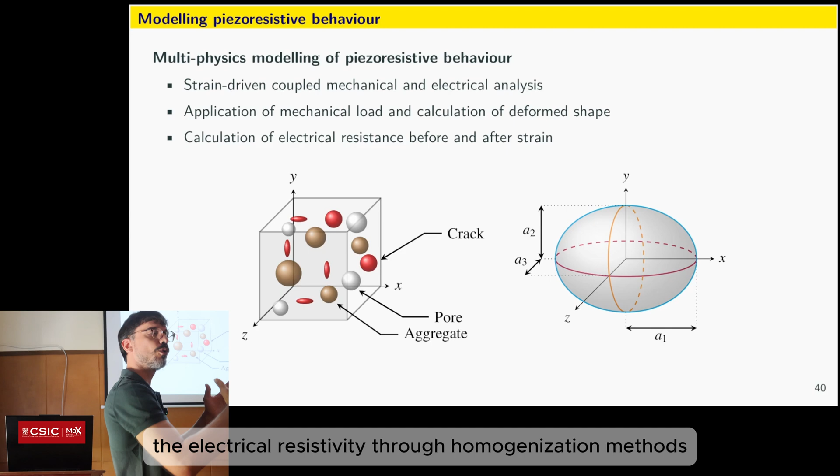So what we need to do is essentially couple two different physics problems in order to explain and quantify the piezoresistive effect in an existing material. So one way to do this is to take the composite material, calculate the electrical resistivity through homogenization methods, then apply a mechanical strain, calculate how it deforms, and then calculate again the electrical resistivity, but taking into account the various mechanisms that are introduced due to this mechanical strain.

What does mechanical strain do in a material? It deforms all of the inclusions inside of it. It deforms the aggregates, it deforms the pores, it deforms the cracks. It changes the aspect ratio. And not only that, it can also change the apparent volume fraction of each individual inclusion in the material.

When you have a relatively deformable matrix with a not so deformable inclusion inside it, like an aggregate, and you compress the matrix, the apparent volume fraction of the aggregate increases. This changes electrical resistivity. And this happens not only in the case of aggregates, it also happens in the case of conductive inclusions. This is the main mechanism that drives this part of the response.

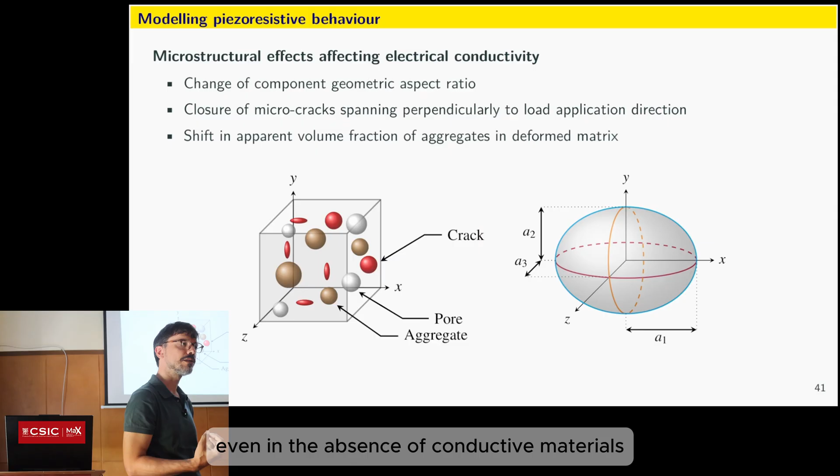The thing is that in cementitious materials, we see an already quite high gauge factor, even in the absence of conductive materials. We can do a simple comparison. What is the gauge factor of a strain gauge? It's 1.4, 1.5, 2, something like that. In cement or concrete or mortar, it can be 10 or 50.

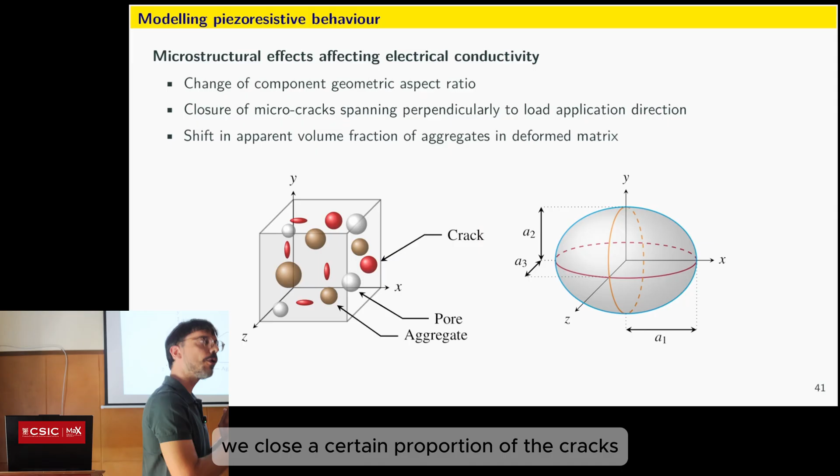Why does this happen? We need to explain it. One possible explanation is the mechanism of crack closure in a material that is compressed. We compress this material, we close a certain proportion of the cracks and create new electrical conduction avenues inside of the material. This reduces the apparent resistivity.

And we can model all of this in a micromechanics context. We have to necessarily adopt a sort of statistical approach for this, because not all cracks have the same width, but they feature this sort of skewed normal distribution. We can take this into account into the model, namely we apply this much compressive force. What is the percentage of the cracks oriented in this direction that is closing, according to this distribution?

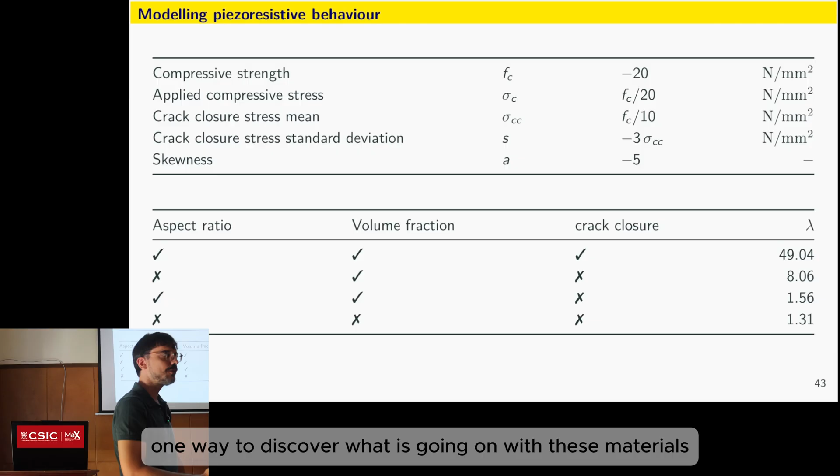We can model all of this quite easily. And in fact, achieve a gauge factor that is closer to what we observed in unmodified materials. So one way to discover what is going on with these materials, and be able to quantify not only the piezoresistive effect, but also damage and strain, is through these simple micromechanics models. We're not there yet, but we are getting closer.

So I think that's all I have for you. I didn't check time, we did not discuss it. Yeah, but for now, that's it. Thank you.